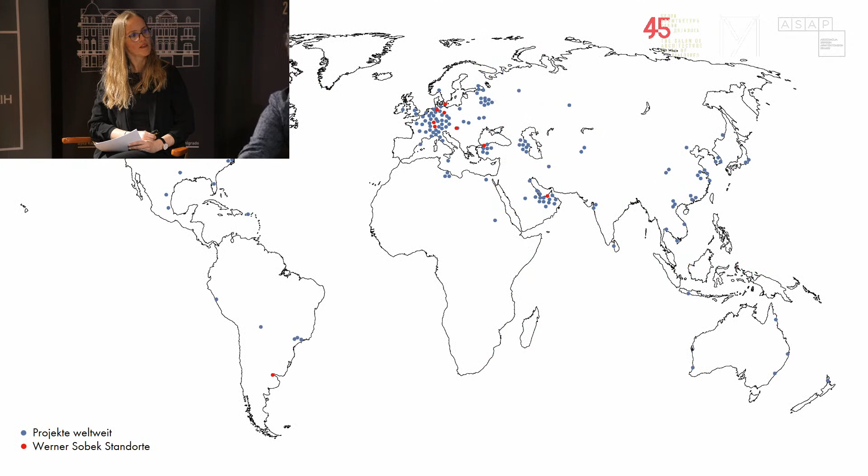We work on all types of structures and materials, so there's no specific limit. As I've already said, we operate and work internationally with a strong focus still in Germany and in Europe, though.

Mostly because the construction industry is a big reason, or one of the reasons, why we're in this situation. Obviously not the only one, but it is a big one. Looking at these figures, the built environment and building activities stand for roughly 35% of the energy consumption, 50% of the mass waste generation, and about 50% of the material consumption. If we look just at mineral building materials like stone, cement, bricks, etc., it would actually be over 80%, so even a lot higher.

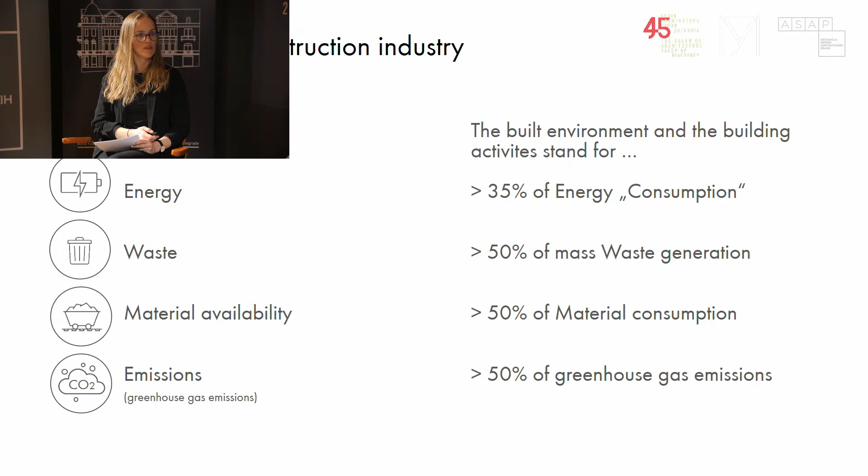This enormous consumption of materials, the waste generation, the energy consumption, and the emissions associated with the building sector are at the same time faced with a growing humanity. So we have to build with less materials, but at the same time we have to build for more people. This is probably one of the biggest challenges we're faced with, that we have to build for more, but with less.

So what are the challenges and things resulting from this? Not for the future, but actually for today—technically yesterday, I should have started with this a long time ago. It's once less and smaller new construction, so we need to refurbish and reuse the existing buildings that we've got.

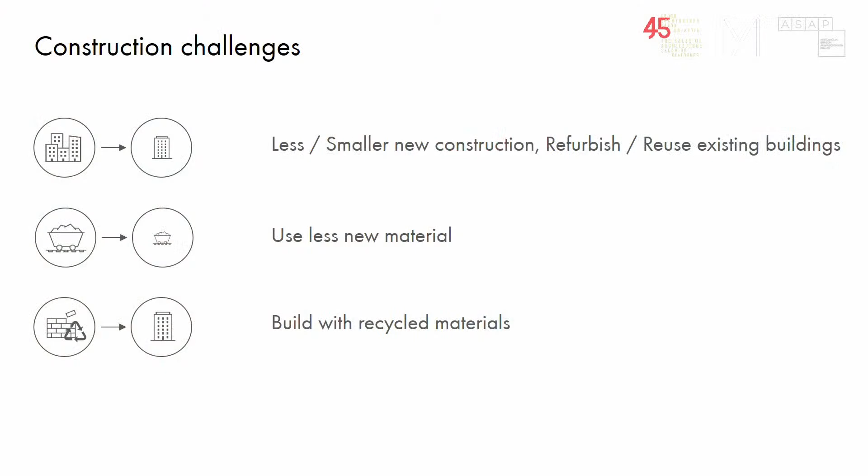Use less new material. We need to build with something, so what should we build with? We need to build with recycled materials, and then again, we need to build in a way that it is recyclable, so that we can take the buildings apart and use the materials in new buildings. All of those challenges are basically aiming towards a zero emission construction of a building.

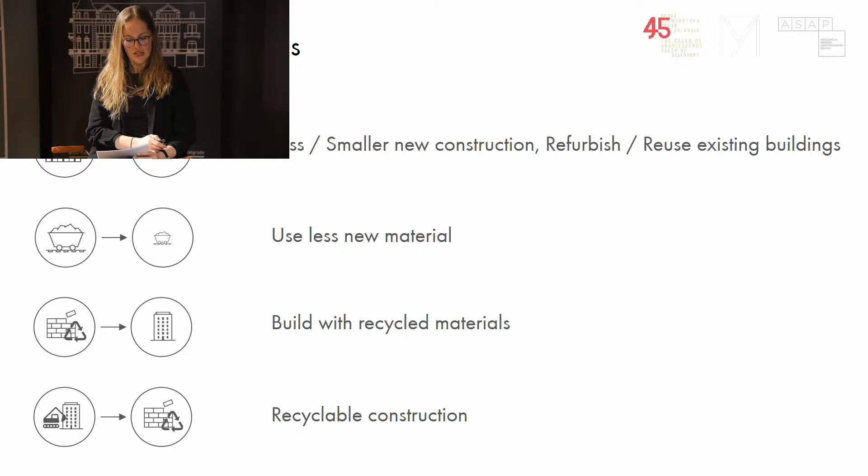We also have to design buildings so there are no emissions during building operation, and at the same time enhance biodiversity and take care of the microclimate.

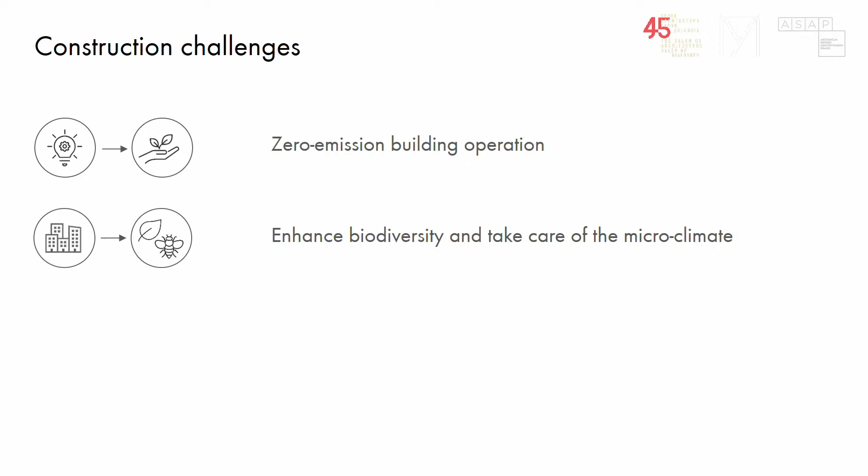So bearing those construction challenges in mind, I'd like to focus on a couple of key factors and show you a couple of project examples, which would be grey emissions, energy, circular economy, and microclimate.

Because some of the buildings built today are unfortunately not used for hundreds of years anymore, as they have been hundreds of years ago. Some of those older buildings are still in use.

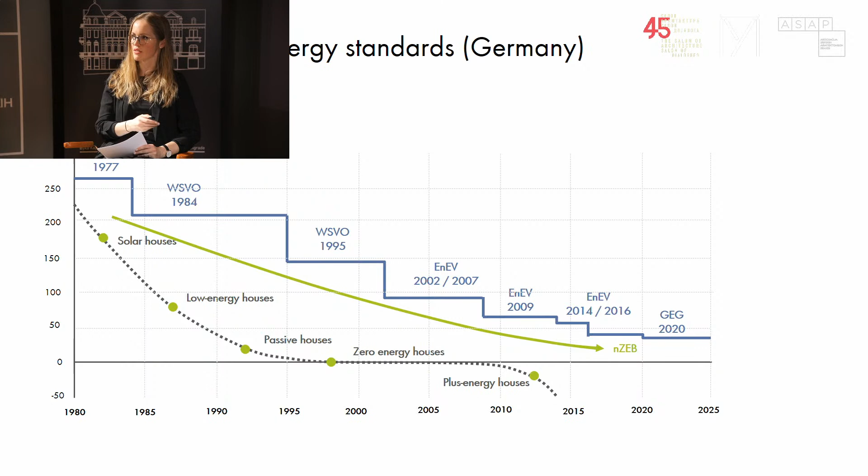So why is that? Here's an example of the development of energy standards in Germany. This is for Germany, but there's been a similar trend in different countries, because there's been quite a big push on energy efficiency in buildings. The legislation has, over the last decades, focused on the energy efficiency of building.

That means the energy consumption has gone down, with new energy regulations coming into place frequently, and therefore the operational phase has decreased significantly if we look at the overall emissions over the life cycle.

What's happening still at the moment is a transformation of the energy mix towards renewable, non-fossil generation. So the emissions will continue to decrease during the operational phase, meaning the construction and the grey emissions will dominate even more and become even more relevant to look at.

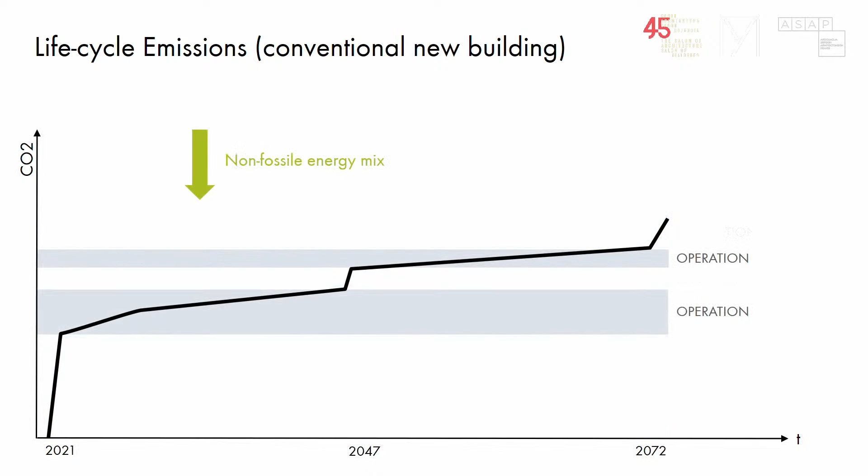Over the last couple of years, in Germany, there's been subsidies by the government for new buildings which have mostly focused on energy efficiency, which we've basically seen here. Similar to the legislation, when a building has been specifically energy efficient, you would get subsidies from the government, which were actually quite attractive for investors.

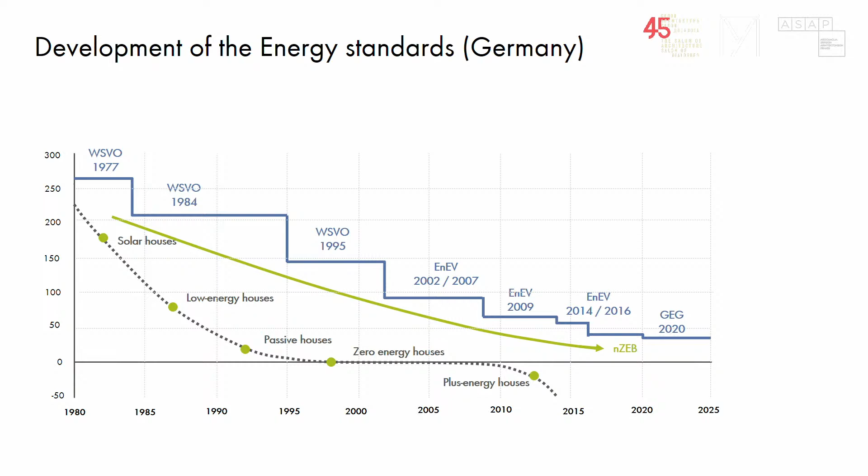Only just now, as of the 1st of April, they've started to not only give subsidies to buildings that are energy efficient, but there's also a second aspect: a certain energy efficiency class needs to be achieved, but also a life cycle analysis with certain values to be achieved. So the grey emissions are now also being taken into account in order to get those subsidies from the government.

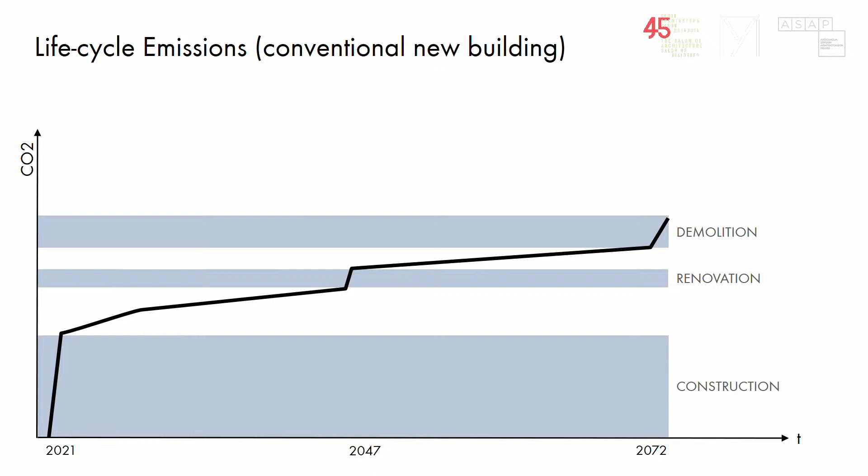The requirements at the moment are still relatively easy to achieve. So basically we're at the beginning, where we started off with the energy efficiency classes a couple of years ago, but it is a start and it will continue to become more and more strict.

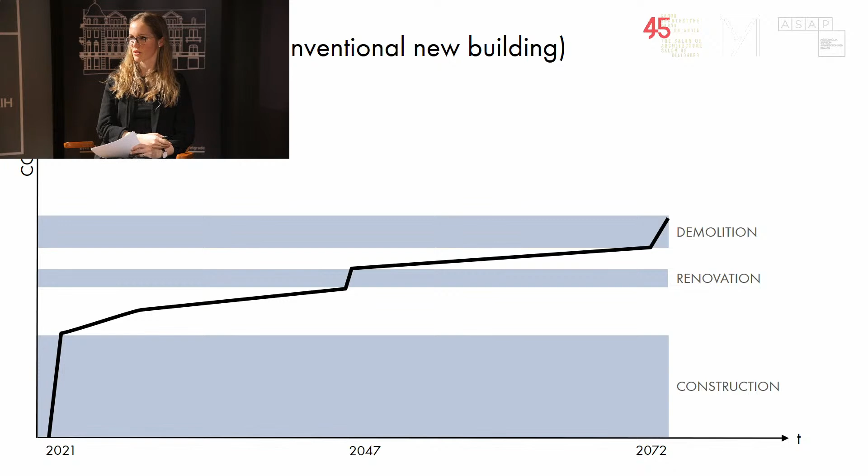So now I'll show you a couple of projects where we looked at the grey emissions in particular. The Q is a refurbishment project of ours in Nuremberg. We were responsible for the structural engineering and the facade engineering.

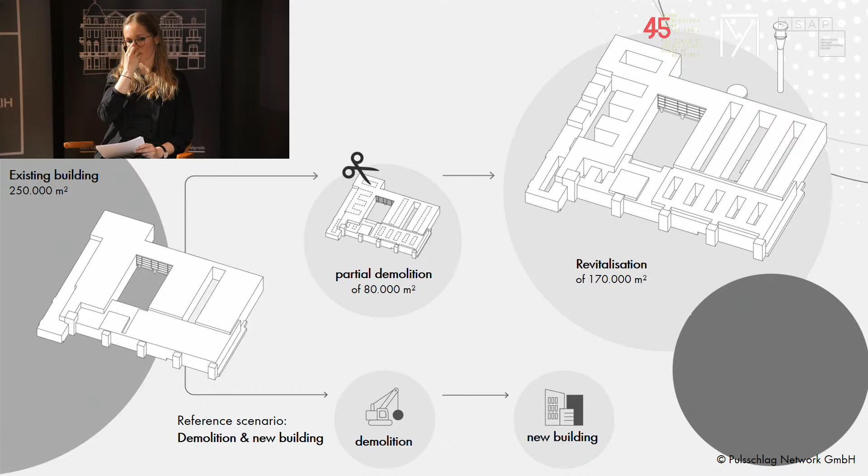There we did an emission study where we looked at two scenarios. The first scenario is revitalization with partial demolition, so a few building parts were taken out, still about 80,000 square meters remaining of this huge project, with 170,000 square meters refurbished. The second scenario was entire demolition and building a new building. To make it comparable, we looked at building exactly the same building in exactly the same standard, with no differences to what's there.

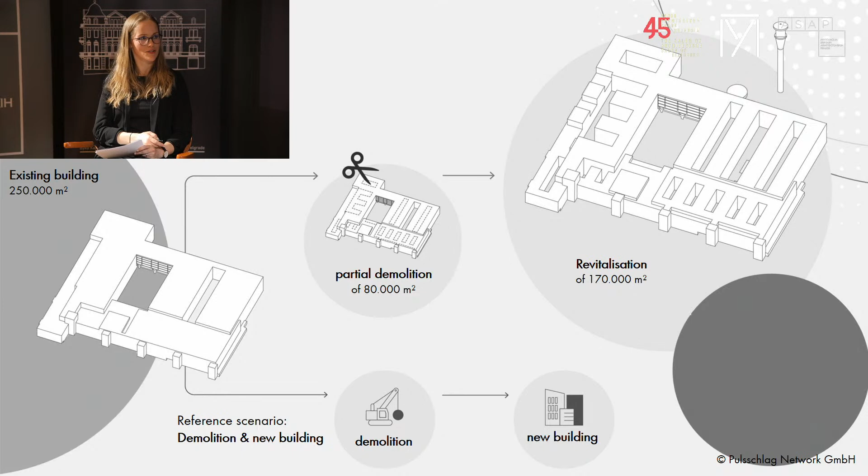Total demolition and new construction is still relatively widespread these days, because in most cases it's actually cheaper and less expensive to tear a building down and build a new one. Also, with existing buildings you're usually faced with difficulties, like ceiling heights which might affect daylight availability, or acoustic problems with the ceiling constructions in place. So it's tricky to use existing buildings, which is why sadly the second scenario is still chosen quite often.

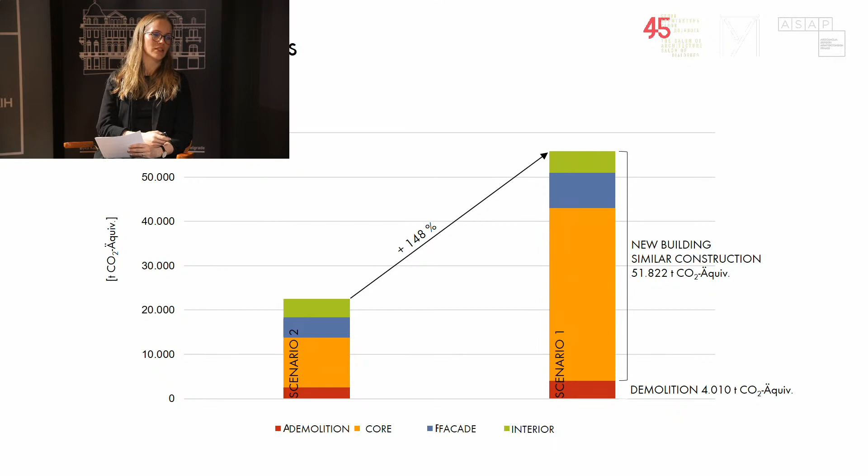What needs to be said is this study was based on certain parameters that were set. As I've already said, we assumed the new building scenario would be exactly the same as the old one. There are obviously aspects like, for instance, materials from the old building that might have been able to be used in the new one - this is something we didn't consider in this scenario.

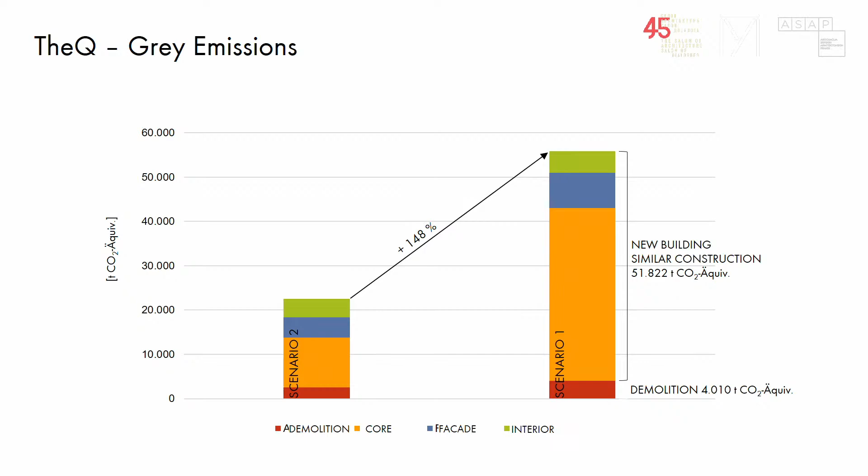At the same time, any structural engineer in this audience might know that with old buildings it's hard to build actually in the same way, because legislation has become more strict - there's a lot more safety factors in the calculations. So we might have had to build with thicker ceilings than they were able to back then. There are obviously a few factors that make this only a rough estimation, but under those parameters, this is the scenario we calculated.

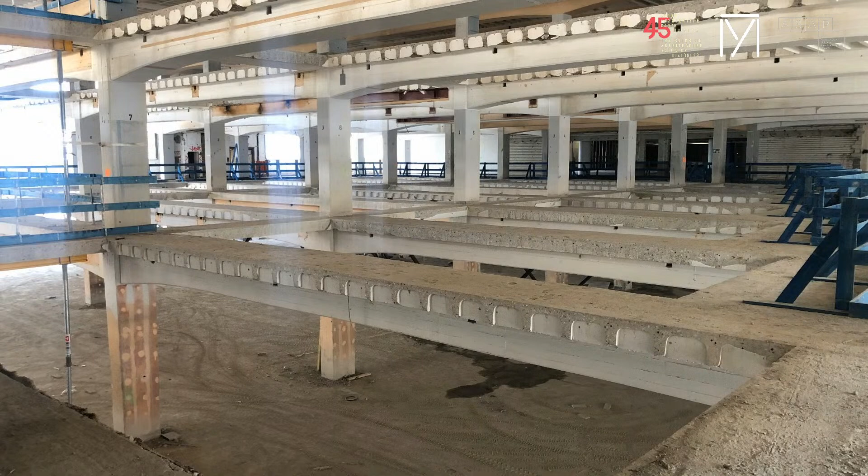This is an image of that partial demolition. There's an atrium space that was created where we took out a few ceiling bays in between the load-bearing structure.

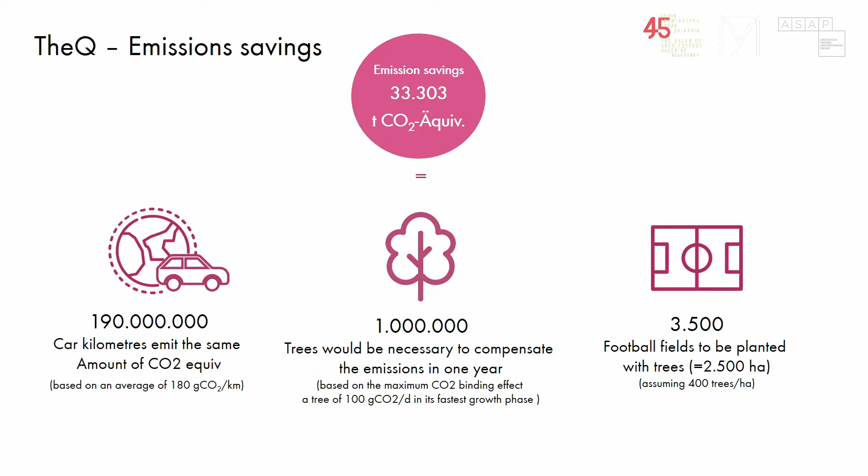The results of that study were that the savings amounted to about 33,000 additional greenhouse gas emissions that were avoided, which would correspond to roughly 190 million car kilometers, or 1 million trees binding this carbon dioxide over a year, which would have to be planted on about 3,500 football fields.

These are enormous figures that make quite clear we need to look at the resources we've got and how we build and treat especially these massive projects when it comes to the basic decisions of whether it's going to be a refurbishment project or a new building.

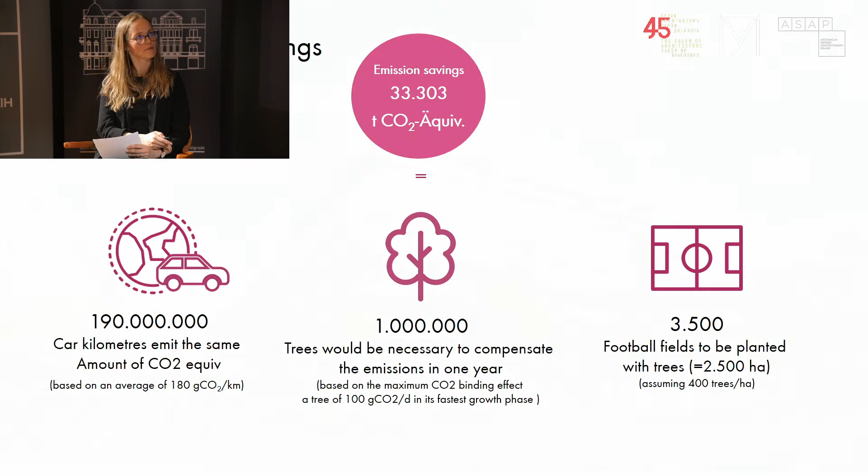A second project where we did basically the same or a similar study is the Althan Quartier in Austria.

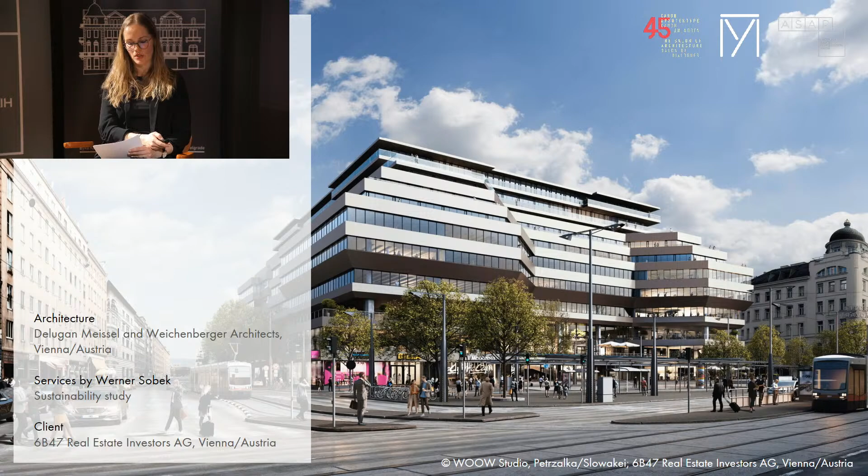Here again, we did a sustainability study investigating whether building new or converting the existing structures with a complete renovation program would have a greater impact on greenhouse gas emissions. The study demonstrated that converting the original buildings would result in 67% fewer greenhouse gas emissions overall. We don't have as nice an image as the first project, just an image of the project itself. Ultimately, the refurbishment scenario was selected and is currently in the planning process.

So this is a couple of examples of how to approach grey emissions. Quite obviously, using existing structures is not always an option, because there might not be an existing building there, or in some cases the existing building might not actually be usable. So for new structures, it's important to look at the project-specific requirements and find the ideal structural system.

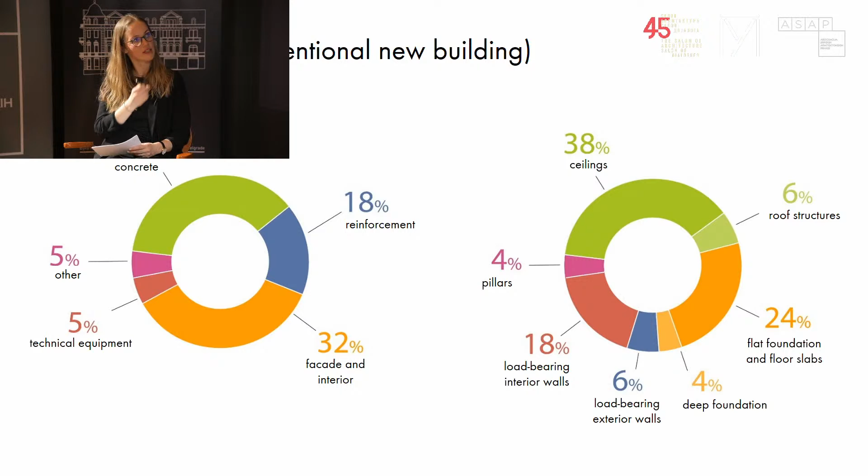If we look at the grey emissions of a conventional new building, a concrete building, from one project example, it's different in every project, but as a rough overview, the grey emissions are mostly almost 60% concrete and reinforcement, roughly 30% facade, and the rest is building equipment and other components. If we look at the figure on the right-hand side, we see the large proportion is actually the ceilings, with almost 40%.

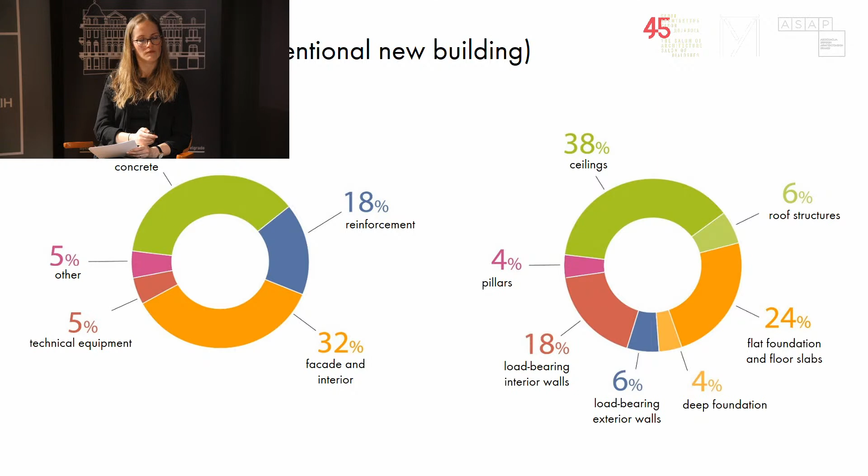So this is one of the main things we need to look at, and this is how we need to approach new buildings and new construction - finding the ideal structural system for each project, which can in some cases be alternative construction methods like wood construction, or a combination of wood and concrete construction. It can also be hollow body ceilings, which are very optimized in regards to the materials being used.

So looking at all of those different scenarios, always taking all aspects into account - one thing is obviously the structural engineering properties that need to be right, and the sustainability aspect, but then aspects like acoustics need to be taken into account too. Can we achieve the acoustic requirements depending on the building usage? So it's always relatively complex, trying to incorporate every single aspect into the decision.

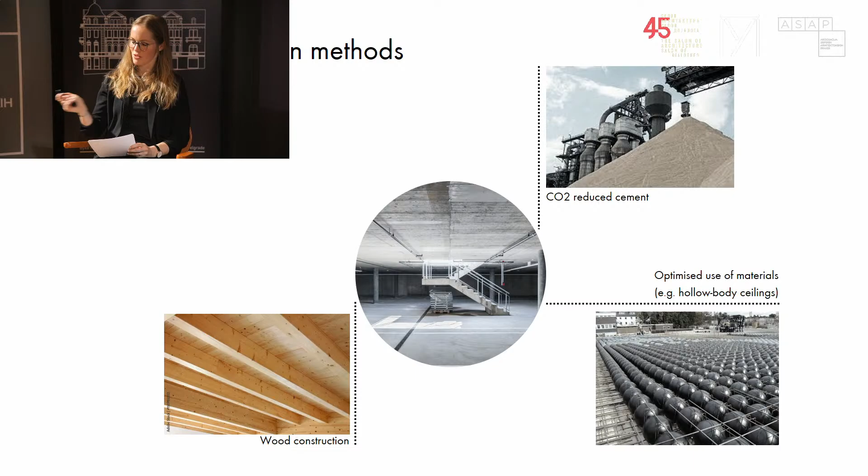Alternative construction methods is one scenario, but even if none of these alternatives is suitable for the project, it's still about looking at the structures in particular and making sure there's no over-dimensioning in the calculations - rather than just defaulting to 25 centimeters of concrete because that's what we're always building, but actually looking at the building and doing the calculations properly to find the ideal scenario for each project.

The good thing about the latter approach is that while with wood construction you're very dependent on the client and the investor - are they up for it, is everyone on board, because wood construction usually has higher costs associated with it - from an engineer's point of view, with the option of just making sure there's no over-dimensioning, every structural engineer can influence this. So this is the baseline and the goal for all our projects: material-reduced structural systems.

So that was about the grey emissions. As we've seen when we looked at the life cycle of grey emissions of a building, I've been talking about how the energy and operational phase is becoming less and less significant. Even so, while the grey emissions might be dominant, we still need to look at the energy consumption and emissions during the use phase.

Firstly, because there are still emissions associated with it - just because it's less doesn't mean we can neglect it. The path towards non-fossil energy generation is still underway, and we will be on that path for a while. Secondly, there's also the social aspect and associated costs, because there are always costs that come with running a building which we need to take into account, and energy bills are a factor in that. So looking at the energy efficiency of buildings is probably the most well-known part of all the topics I'm going to talk about, but it's still an aspect we need to address.

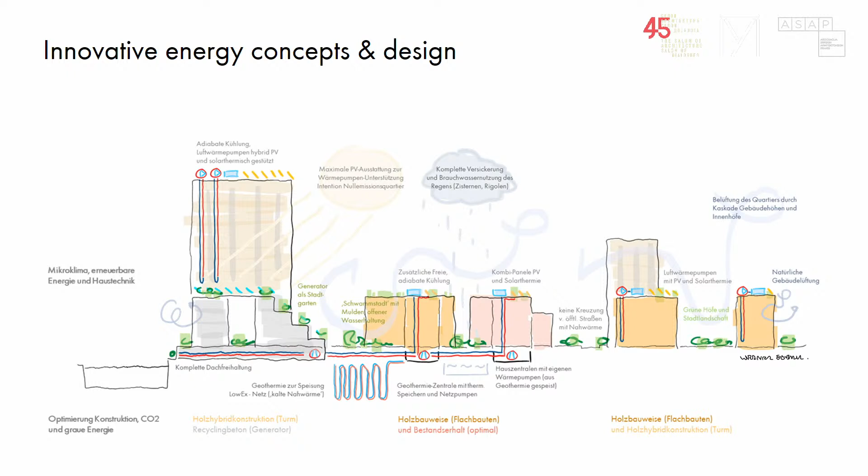The approach is innovative energy concepts. The most important part is looking at both active strategies, but mostly passive strategies, like solar gains through windows. What passive strategies can we use, without actually using any energy, to reduce the energy consumption of buildings? For instance, solar gains - in summer we don't want them, in winter we do want them. So we look at adaptable strategies to make use of those.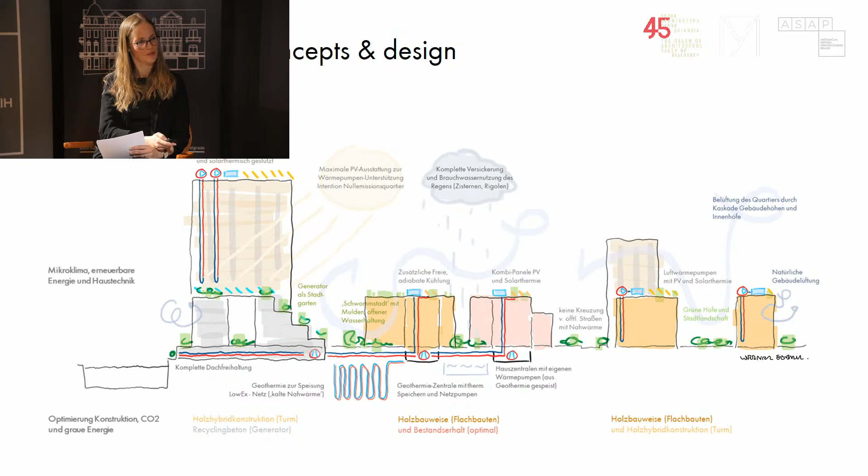One important tool is always simulations of all sorts, in this case a photovoltaic simulation. This is always a tool that can be hard to sell to the client at the beginning of the project, because why do you need simulations when you can just calculate it? But it is the best way to efficiently find the right system for the project.

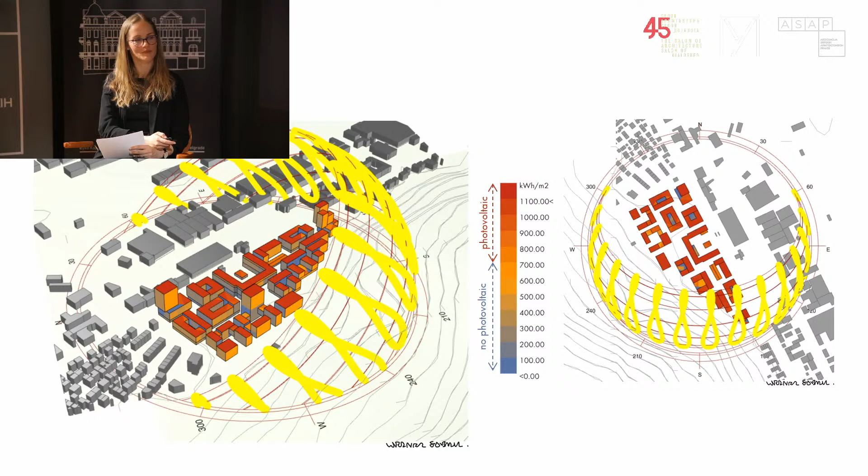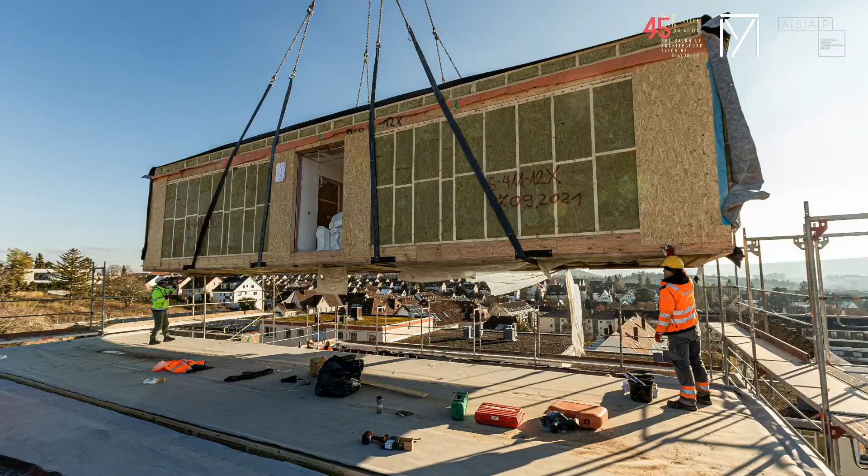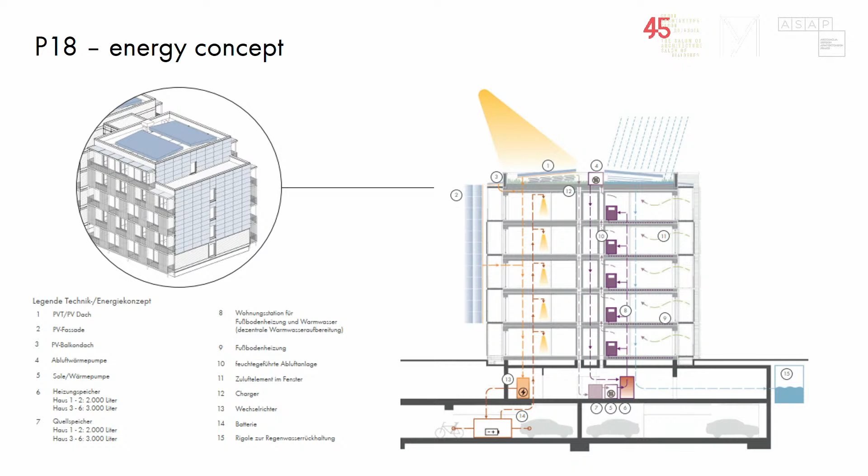The goal of this project was to make it an entire Plus Energy Quarter. This was done using PVT collectors that generate electricity but also heat, serving as a source for the heat pumps. There are also small exhaust air heat pumps that are put into the main circuit of the heat pumps. The entire building envelope is built according to passive house standard, and in an annual balance, more energy is actually generated from sustainable sources than is needed.

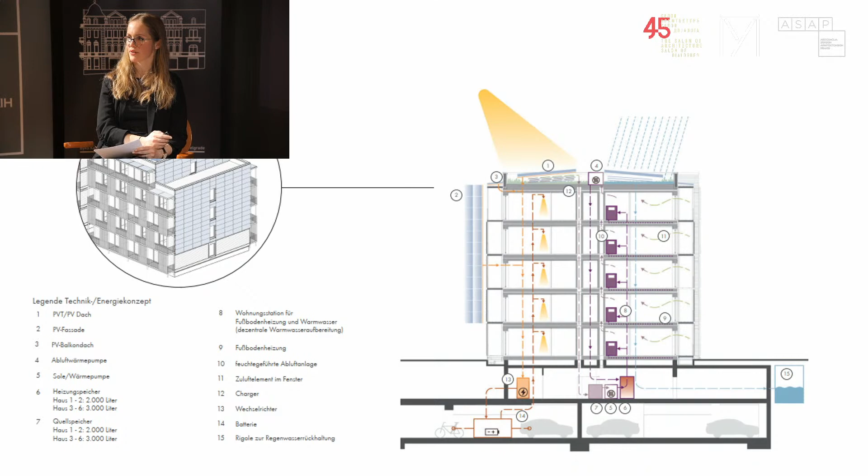This efficient energy concept was also made possible by means of simulations. A lot of simulations were carried out by the MEP and technical building equipment teams, because the purely static regulations approach is just not useful in those cases. This is also an image of this. The first part of the project has been completed, and now the second phase is in construction.

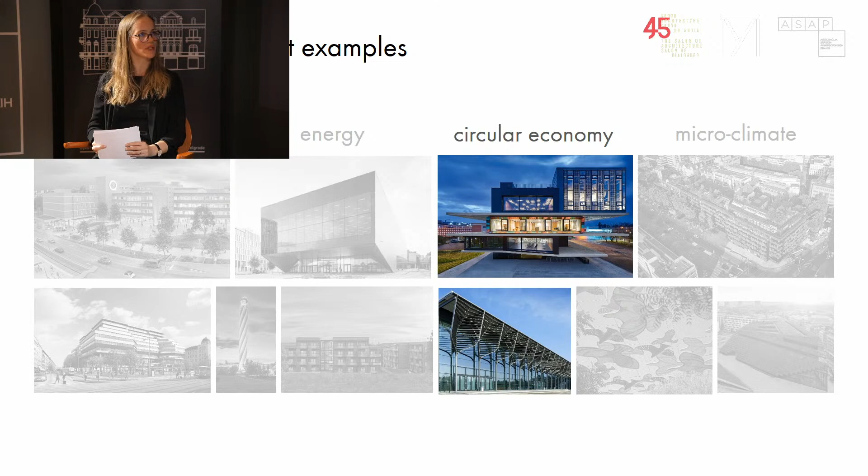Grey emissions and energy were probably already quite widespread topics that most of you have heard about, and they've been in the press for a while. Circular economy is something that is becoming more and more relevant. There's not been such a big focus on it, also not in Germany. There's no strict regulations that buildings have to comply with certain standards in that regard. So probably to start with, what kind of economic models are there?

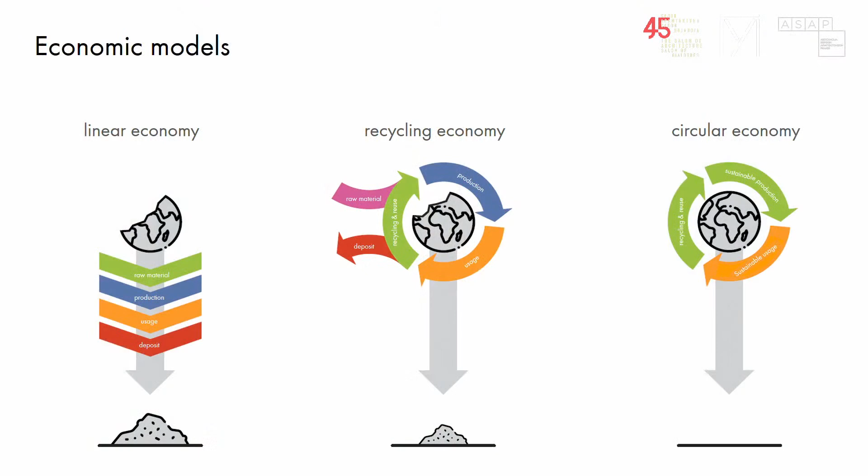There's the linear economy where everything is wasted at the end, and there's the recycling economy, which is probably the standard these days. We try to recycle a lot. Recycling economy means there's a lot of downcycling though, or some of the things are recycled and reused, but there's a lot of downcycling and still some waste being generated.

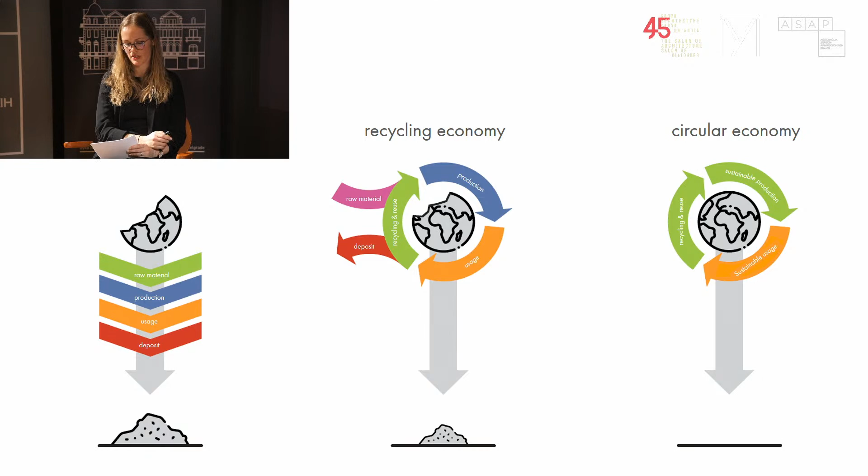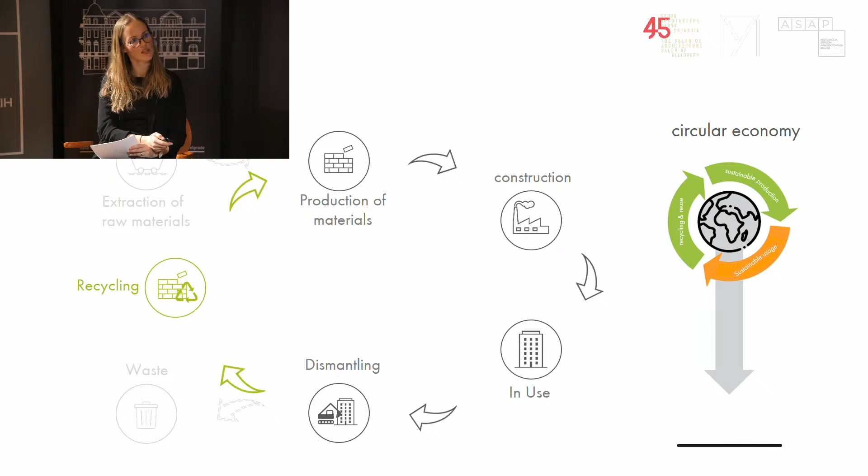And then there's a circular economy where all materials are kept in the loop. As you might have guessed, this is the model that we need to aim for in the construction industry, meaning that the materials we use in our buildings can be taken apart at the end of the building's lifetime and then used without being wasted in the new building. Either they can just be used as they are, or maybe some processing is done, but this is what we should aim for. A prime example is the experimental unit of mining and recycling, UMAR, in the research building Nest in Switzerland.

It's the module in the middle. It's an entire big research project, and we developed the middle section, the middle unit for it. The principle of the design is that all resources needed to produce a building must be fully reusable, recyclable, or compostable. So that was the design thesis for that project.

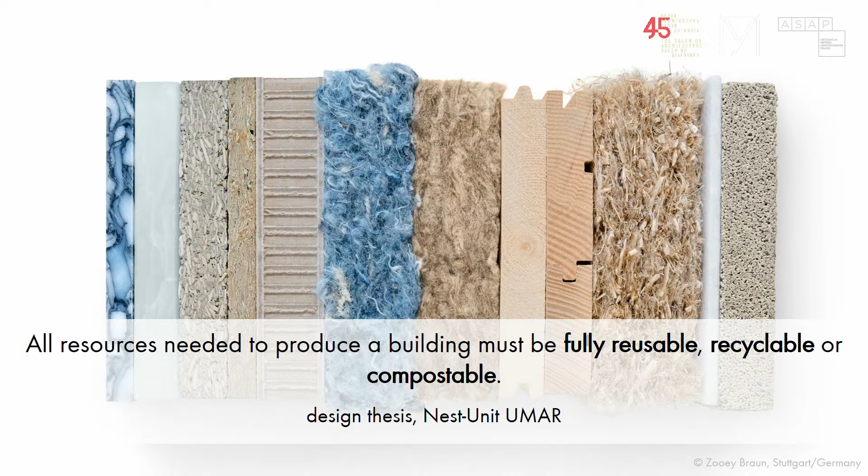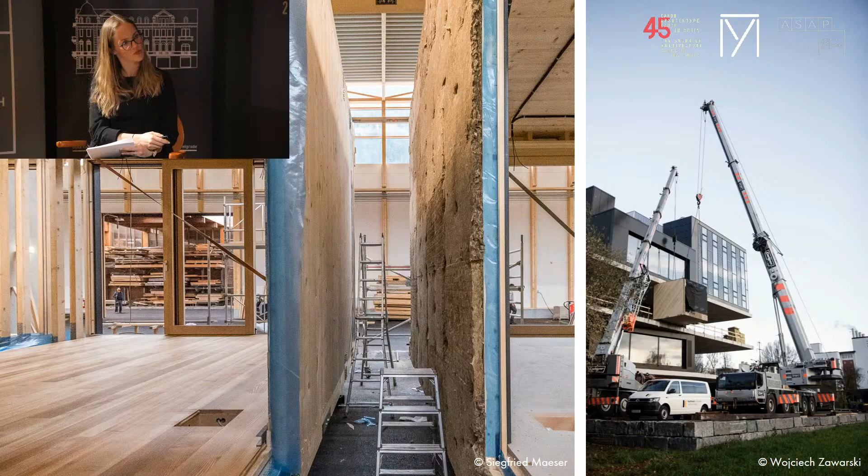Therefore the project can be seen as a temporary material storage. The materials are stored there, serving as a storage unit, and then they can be used in other projects or otherwise afterwards. So the building is completely prefabricated from modular construction, as you can see here. With those images on the right-hand side, you can see how it was put into the building - left-hand side is still when it was prefabricated, and the right-hand side is when it's actually put into the building.

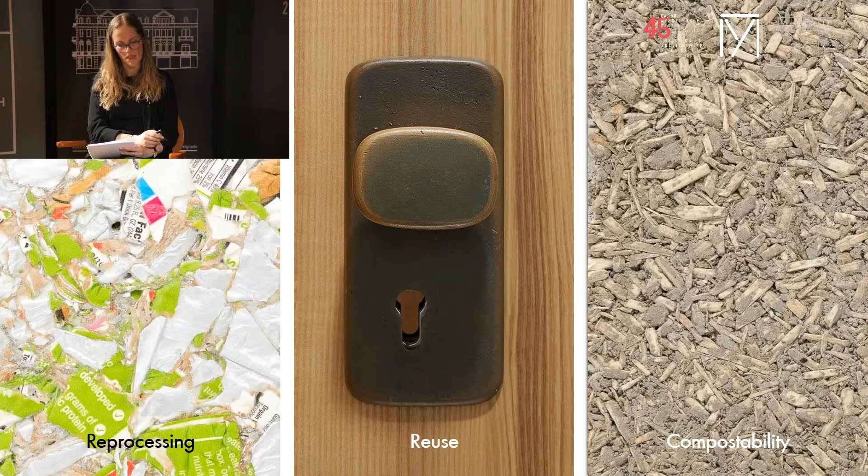The principles that play a role here are reprocessing, reusing, and compostability. For example, those door handles in the middle, they were reused from another project. They were taken out of a building that was about to be torn down and then reused in this unit.

In order to ensure deconstructibility and recyclability, the connections are particularly important, because if we glue everything together, we can't take the materials apart anymore. So there's only screws, joints, and brackets being used, and no actual glued joints in this project.

We experimented a lot with alternative materials, which is easy to do in an experimental project. It's sometimes harder to do in regular projects. But I'll show you just a couple of examples.

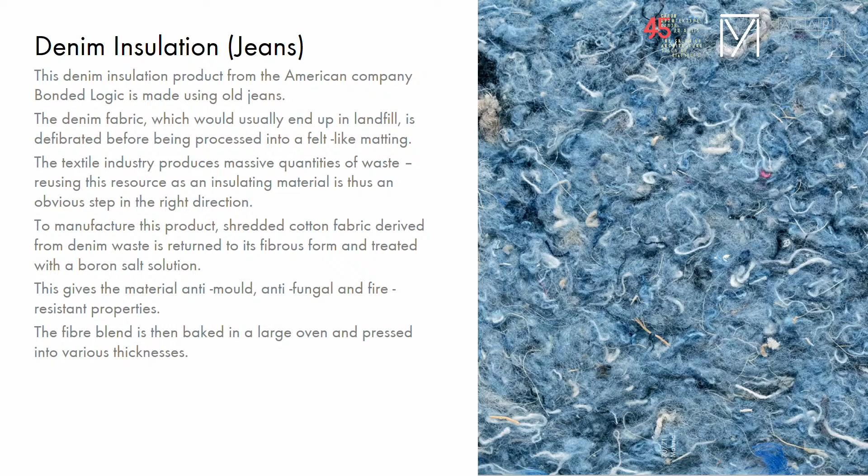This is, as you can already see from the color as well, a denim insulation product that was made using old jeans. Usually those old jeans would end up in landfill, and in this case it was processed into felt-like matting. Since the textile industry produces massive quantities of waste, especially with fashion these days - some shops literally sell clothes meant to be worn once - reusing this resource is an obvious step in the right direction.

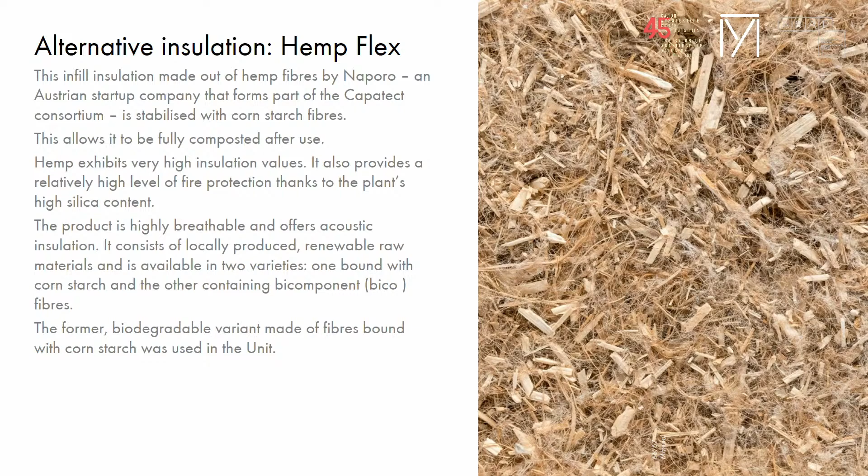There was an infill insulation made out of hemp fibers, which were stabilized with cornstarch fibers. Because it's a natural product, it allows for full composting after use. It's got relatively high insulation values and offers quite good fire protection, also good acoustic values.

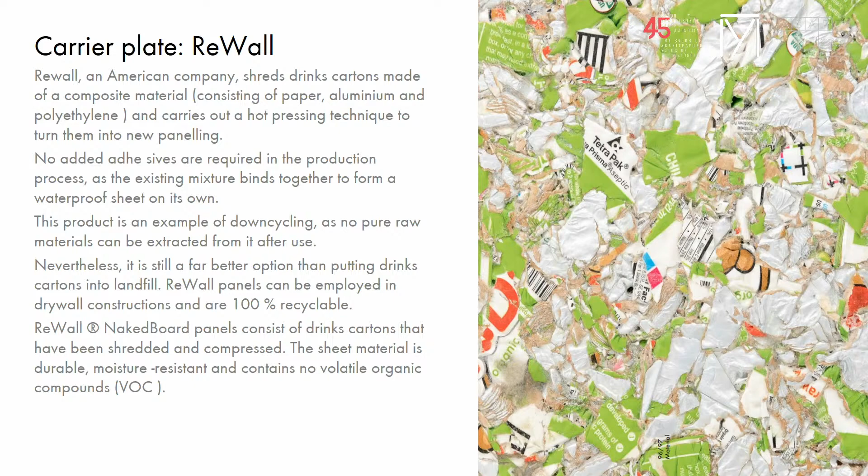Here, I guess from the image alone, you can see what this product is made of. It's shredded drink cartons made out of composite materials - the carton consists of paper, aluminium, and polyethylene. By a hot pressing technique, they're turned into new paneling. There's actually no added adhesives needed, because all the ingredients in there already bind them together. So this is an example of downcycling - you can't use it again afterwards, you can only use it for what it is, but still better than putting it into landfill in the first place.

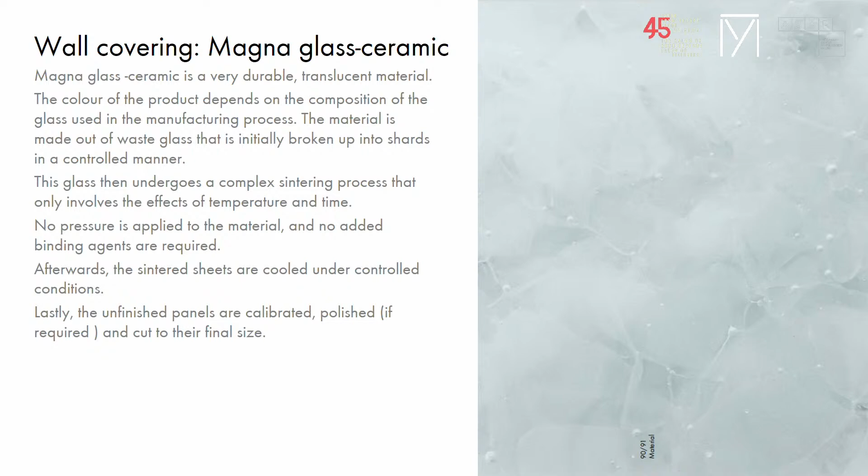One last example would be magna glass, which is made out of waste glass that is initially broken up into shards and then undergoes a complex sintering process that only involves effects of temperature and time, and then makes quite nice glass panels.

So the project proves that ecological material selection does not necessarily mean that design demands have to be waived. On the contrary, it's sometimes quite the intensive examination of cycle-friendly building methods and the questioning of standards that inspires architectural quality, because you're made to think in alternative ways about what different things we could do. It can be quite inspiring.

With it being a research project, it's unfortunately not a building standard yet. So this is a relatively unique project as it is at the moment.

What can be a first step, though a very small one, is sustainability building certifications, because they evaluate a lot of different aspects, and among the criteria evaluated is the deconstruction and recycling possibilities. So it does make you think about these aspects, evaluate and question them. Even though the certification system has no minimum requirement, so a project can still get certified without complying with any of these issues, it is a good start to make people and project teams think about them.

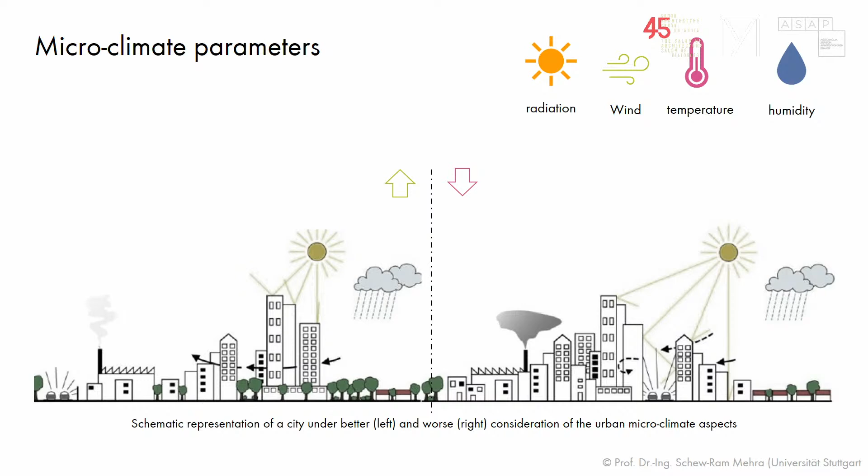The factors that need to be looked at in more detail to improve the microclimate are vegetation — bringing green into the cities — water surfaces, materials of all sorts, whether on the floor or facades, all the materials in the city that contribute to the microclimate, and also shading and the supply of fresh air.

All of these need to be taken into account at the urban planning level, when planning out quarters. But most projects are actually only individual buildings — planning one new office building or residential building. In those cases, it's looking at that side as well, and there are a lot of architectural measures when designing a building that can be taken to contribute to the improvement of the microclimate.

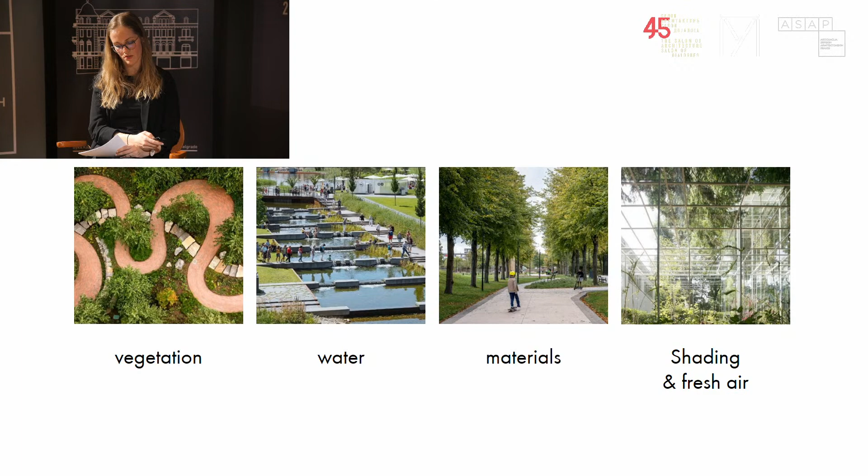In order to verify and evaluate these measures during the planning process, extensive microclimate simulations are carried out, to evaluate the concepts we're thinking about, how effective they are, and to look at different scenarios and compare them.

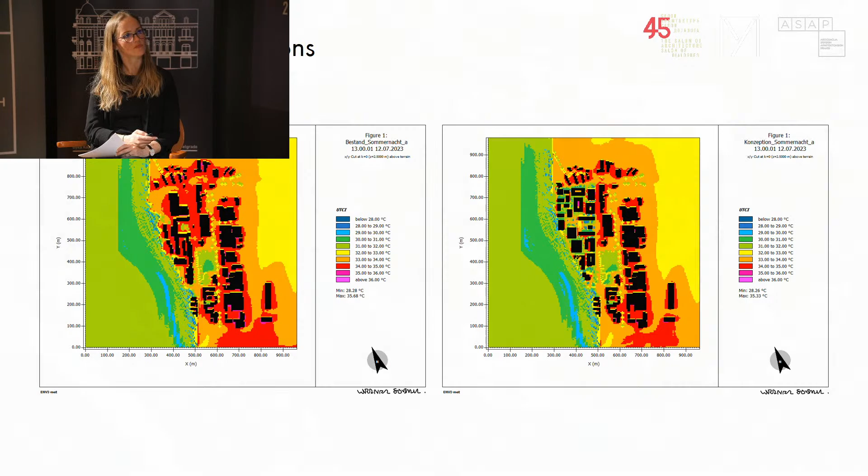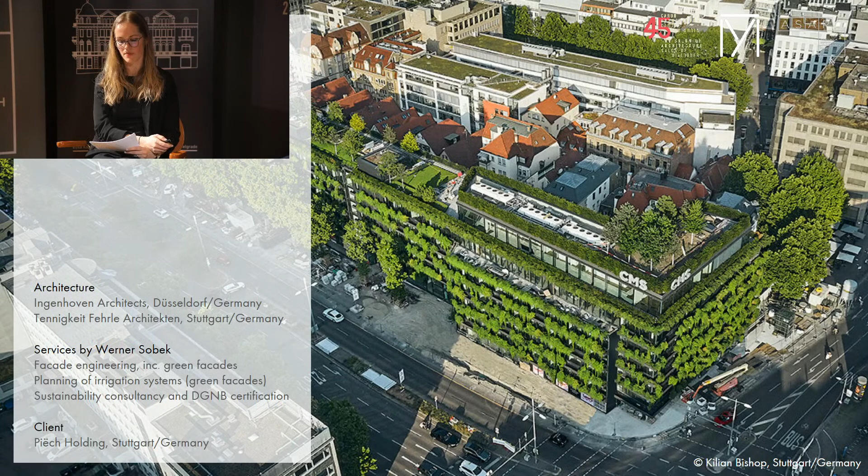One of the projects that is currently in the finishing phase, with the first tenants already moved in and only the last few bits being done, is the Calwer Passage in Stuttgart, Germany, where we provided facade engineering services, including the very dominant green facade, as well as sustainability consultancy and the DGNB certification.

The building will be certified according to DGNB Gold. At the moment, we are just putting together the final documentation to hand it in to be certified.

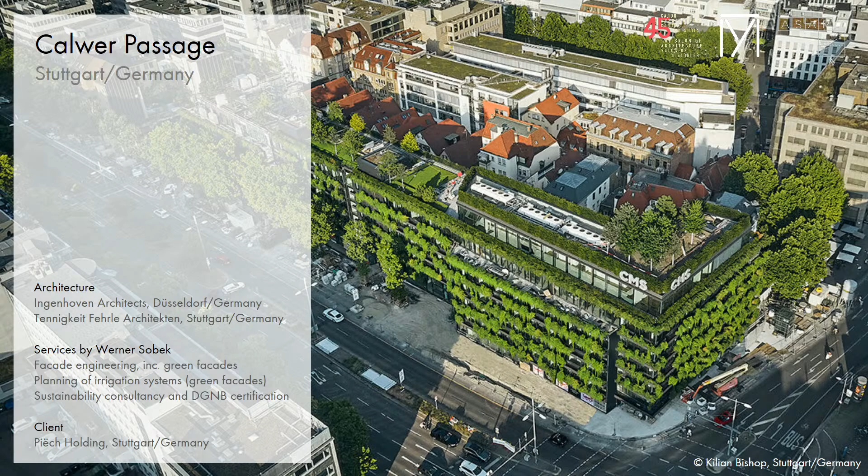The building stands out quite obviously due to its green facade, which makes an effective contribution to the microclimate in the surrounding area, which we can see here. These are already actual images.

Green facades have a lot of advantages and disadvantages. Starting with the advantages, probably the most obvious one is the improvement of the cityscape. It helps the well-being of people in the city, it makes you feel good, it's like a quality of life that it brings to a city.

Especially in that project, it's one of those where people walk through the city not knowing where they are, and then suddenly they're just looking at that facade and admiring it. So this is to the outside, to the city, but also from the inside. It's nice to see the green from the inside.

Another advantage would be rainwater management, so the retention of rainwater in the substrate, which then leads to a delayed release, which in this type of green facade is a lot less than it would be in horizontal vegetation.

Then biodiversity - it provides very valuable habitats for various animal species, especially when you use local plants. But biodiversity depends on who you ask. It can also be seen as a disadvantage, because quite obviously when you open your window, the chance of an insect coming in is a lot higher than if there wouldn't be a green facade right outside. So it probably depends on the point of view in that case.

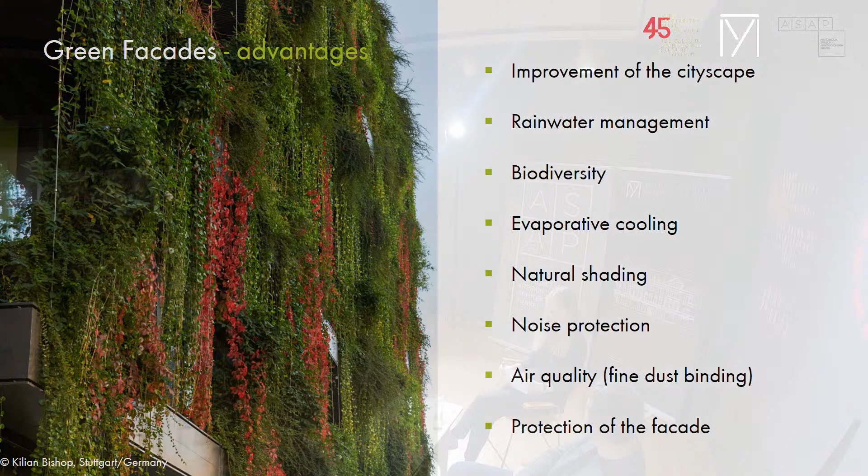Evaporative cooling is quite a significant factor, because with the plants they can actually decrease the temperature by 1.5 to 3.5 Kelvin compared to the temperature around it. There's also the natural shading aspect, which leads to a reduced surface temperature.

Noise protection works both ways - it provides noise protection for the people working inside the building if there's a very busy road outside, but it also absorbs noise, which makes it a lot more pleasant on the outside in the city.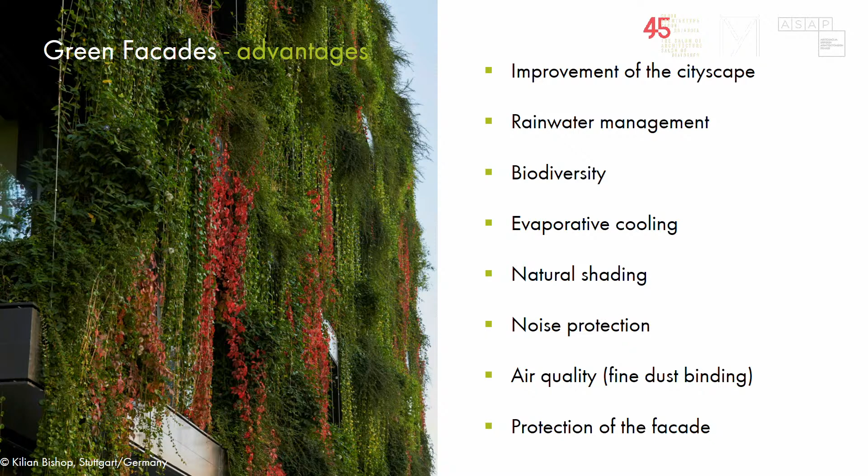And there's air quality, because the plants bind fine dust, which is a huge problem especially in Stuttgart, since Stuttgart is in a valley, so we've got a huge problem there with fine dust from the streets. And obviously the plants provide oxygen as well.

It also provides protection of the facade, because the vegetation protects it from external influences such as weather conditions like storms and hail. Obviously, it only protects the facade if there is no damage caused by the roots of the plants - that can be ruled out.

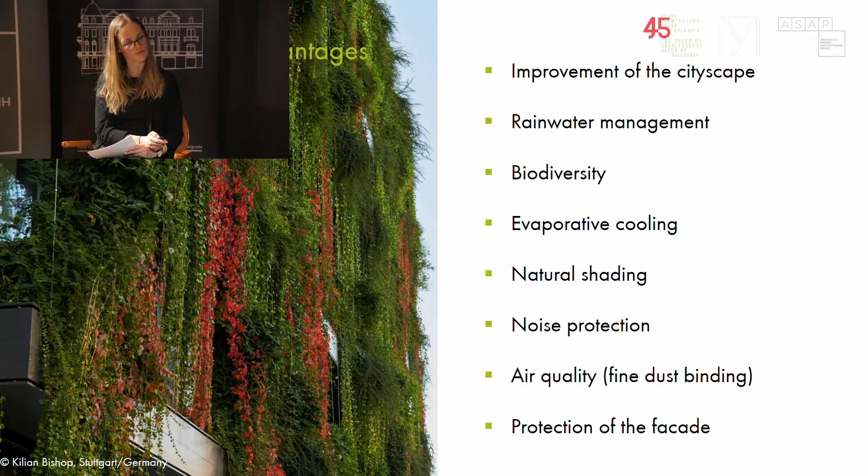Now the disadvantages. First is the higher planning and production costs, depending on what perspective you're looking at it from. It is obviously a lot more expensive - you need additional materials, you need additional specialist planners, so it costs a lot more. And in that regard, this is a bit of a tricky scenario.

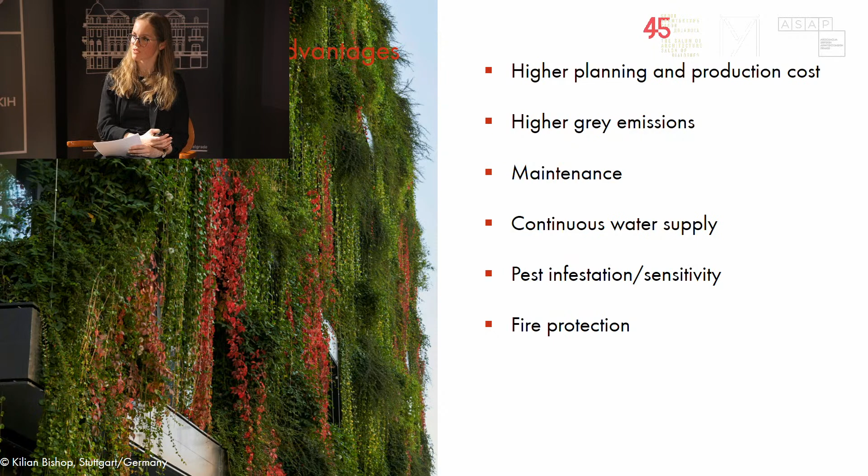There's a lot of higher grey emissions associated with it, because all of those steel structures underneath that are used to hold the plants wouldn't serve any purpose if the plants weren't there. So it's that kind of evaluation that needs to be made - what is the green facade worth to me?

Maintenance is another issue - the plants need to be maintained in a very regular cycle, with a continuous water supply needed, because this facade is obviously only nice if it's green. No one would be looking at this building if it were brown and dry. So there's a big issue with continuous water supply, and you need to look specifically at things like grey water use, to see how you can reduce the fresh water actually needed.

Then there's pest sensitivity - having a lot more vegetation close to the facade can bring in pests. And there's fire protection, especially if the facade gets dry, which is a big issue that needs to be dealt with.

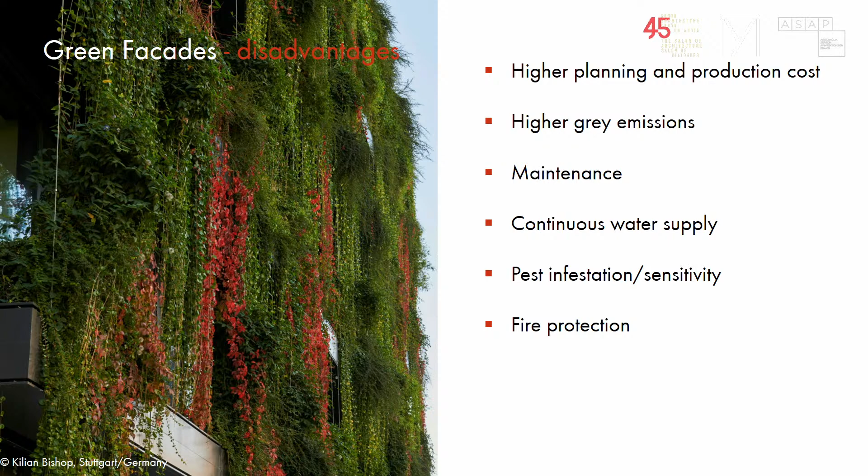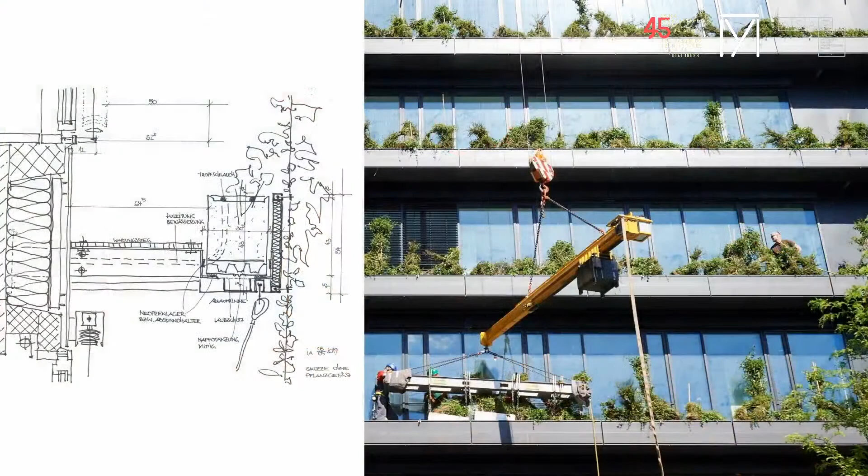So here's still a few images of the project with a sort of hand drawing showing how it's set up, from when the plants were put in place. This is from underneath, so it's truly fascinating to look at. Anyone who's ever in Stuttgart, it's definitely worth paying a visit.

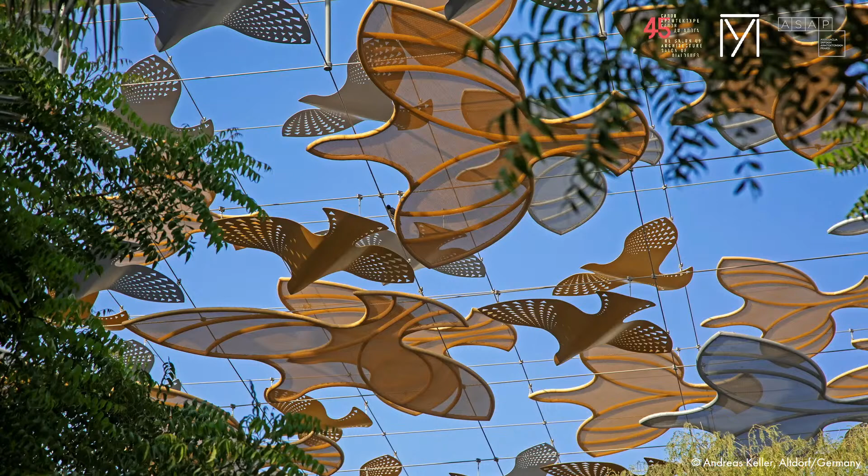Another project when looking at microclimate is the Expo Shades. We developed a trio of innovative shading systems for Expo 2020 in Dubai, linking together all of the national pavilions of the exhibition site. The first system is multi-layered horizontal cable net structures with approximately 3,500 membrane elements in those bird-shaped membranes, spanning various sizes up to 4 meters.

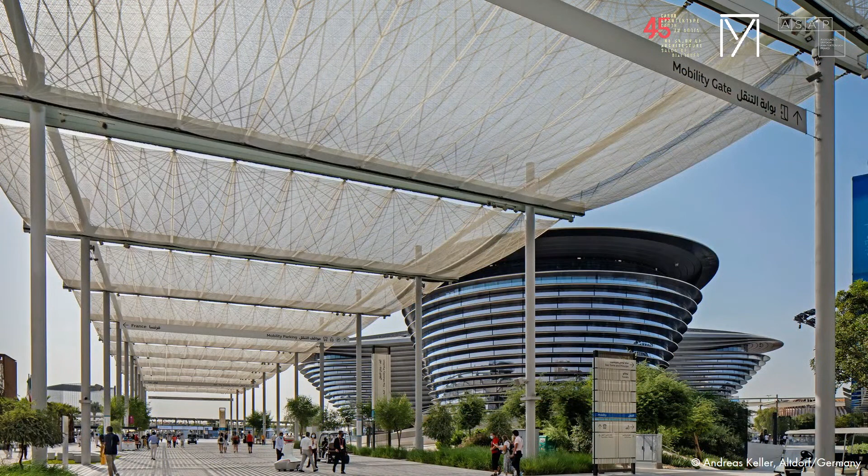The second shading system is also a membrane structure that can be moved if there are excessive wind loads, and the design offers shade during the day and can be used as a projection surface at night. The third system is made of pergolas with plants put in place, around 11,000 climbing plants that offer shade while providing natural cooling via transpiration.

All three shading systems were constructed in a way that they can tolerate high deformations, using quite large spans so that they don't compromise the views on the surrounding landscape.

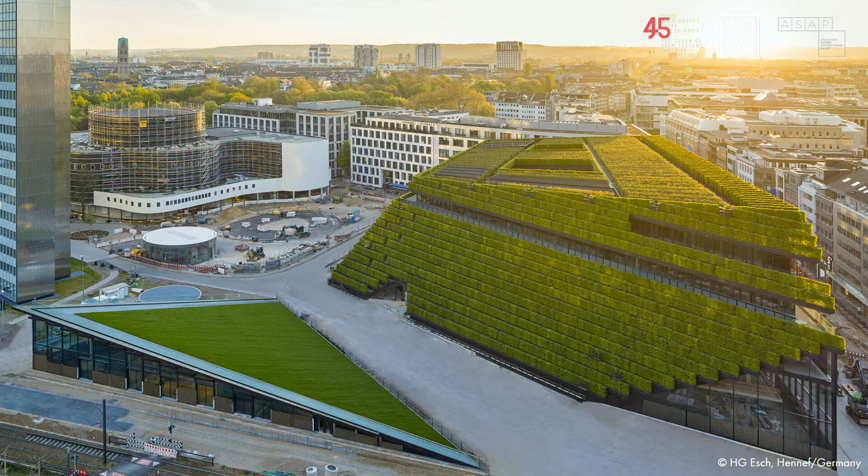And the third project I'd like to show you in the context of microclimate is another green facade, the Köbogen in Düsseldorf. It's an office and commercial building where we did the facade engineering, and it's planted with more than 30,000 trees — here we can see them.

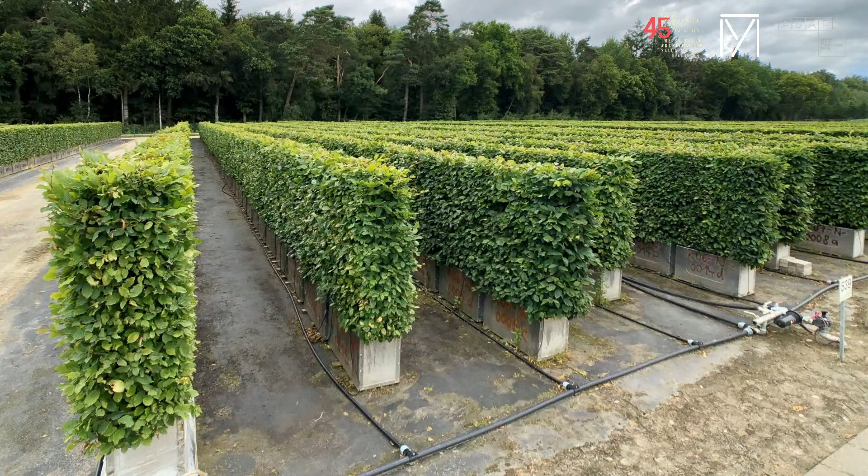Obviously, they weren't put up and then left to grow — they had to grow first, and then were put into place. So the facade looks like this once the building is finished, though at this point the building wasn't actually finished yet on the interior.

We've already talked about the advantages and disadvantages. It reduces solar heat radiation, stores moisture, and this facade roughly absorbs as much carbon dioxide as 80 large trees would. This project was also certified — we didn't do the certification ourselves, but it received the highest possible certification, platinum level, from the German Sustainable Building Council, the DGNB system.

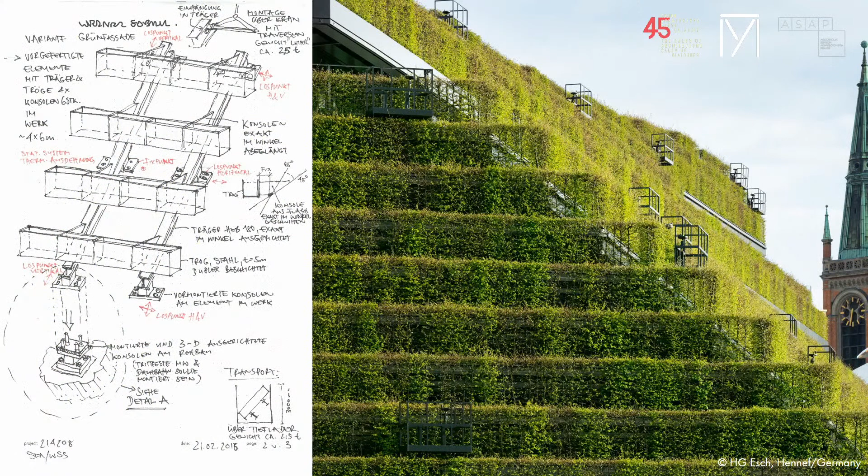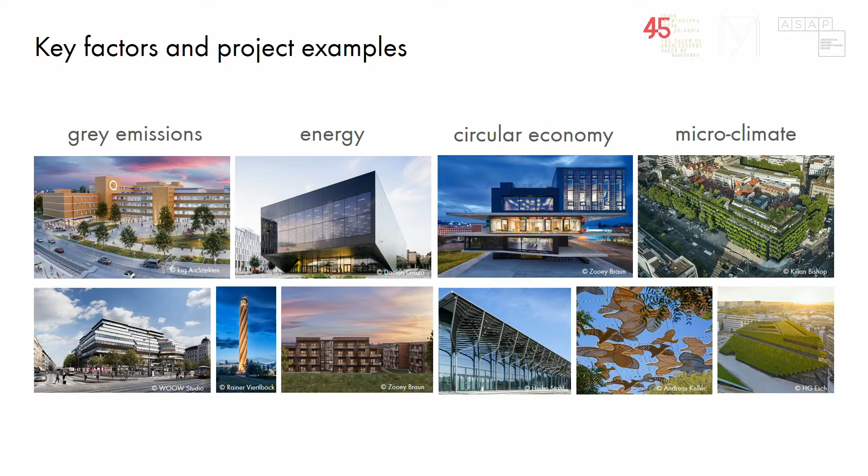So these were a couple of projects focusing on those factors: grey emissions, energy, circular economy, and microclimate. Why did we talk about those factors? Why did I show you those examples?

Going back a bit to the challenges that we talked about and looked at — I'm not going to read them out loud again, but truth be told, it's hardly ever possible to incorporate them all into your projects. As you've seen, I've shown you specific projects for all of those key aspects, because I wanted to show you a wide range of projects, different types of project, different approaches.

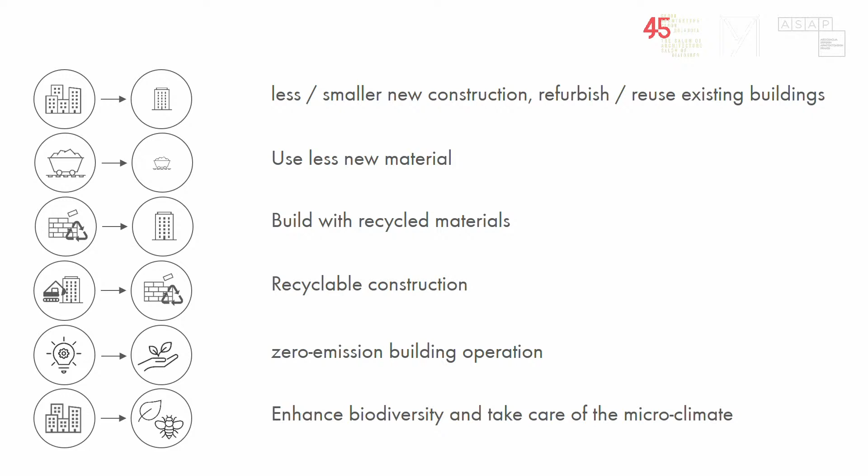But also because there's no project that serves them all. For instance, the House of the Future that we've seen, the building in Berlin, has a very innovative energy concept and strives for zero emission operation, but doesn't have any positive impact on the microclimate. Whereas the projects we've seen lastly, which have a great influence on the microclimate, do not have an outstanding energy concept or recycling concept.

So this is the problem we're faced with — it's not so easy. There is no very clear path, no simple checklist of things to comply with that gives you the perfect building. There are all sorts of different aspects that need to be taken into account and then evaluated.

So how do we start a sustainable project, or how do we try to start those projects? First we do a context analysis. We ask: what is sustainable for the client, for the location, for the use of the building? What are the project-specific requirements and aspects that come with the location, the usage, or the client?

From that context analysis, we put together a catalog of requirements that emerges from this, and make a prioritization of the requirements and the definition of the goals. Important in that regard is always that the goals need to be verifiable—achievable goals that we can actually look at and define. After this goal definition, it's a criteria catalog where we put together all the strategies, the measures, and the evaluation of the achievement of the objectives.